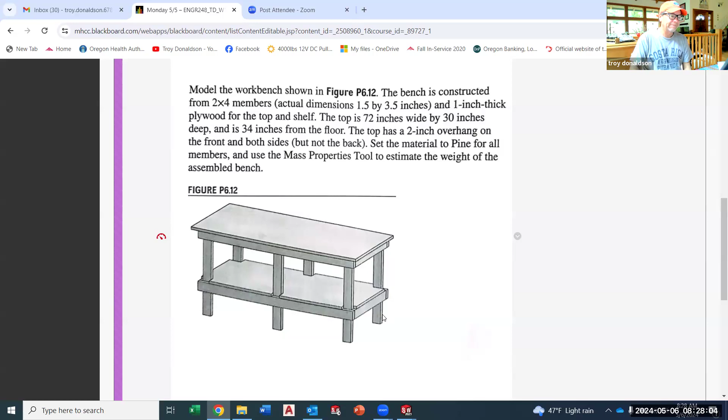In the end, you're going to give me a drawing, so you're going to create a drawing on B size. This will be additional practice at creating drawings with dimensions. Maybe a front, top, side view would be good. It'll be a drawing of the assembled table, and then just call out some important dimensions so somebody could actually build it. So that's our goal, is to create a drawing.

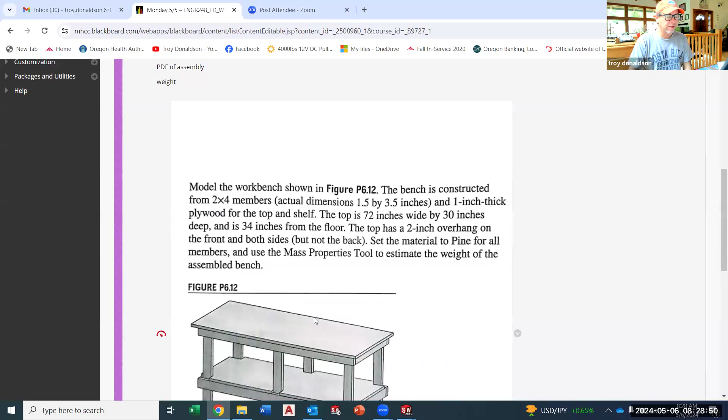All right, the top is 0.75, three quarters of an inch pine. And use a 2-inch overhang on the front and the two sides, but not the back. The back is flush because it would sit up against a wall.

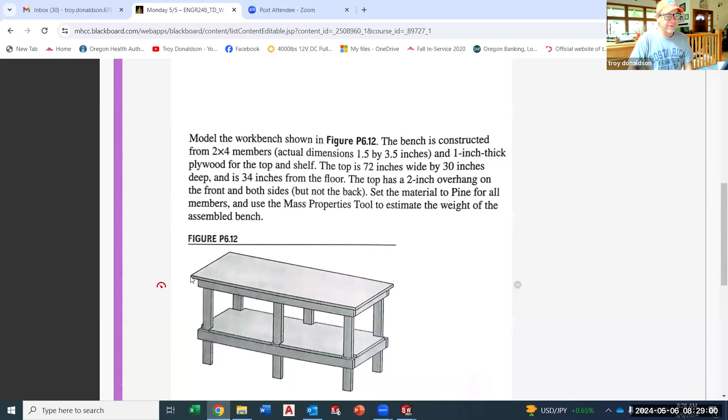So, all right, that's enough. So that would make the top 76 inches by 32. So maybe I'll model that also.

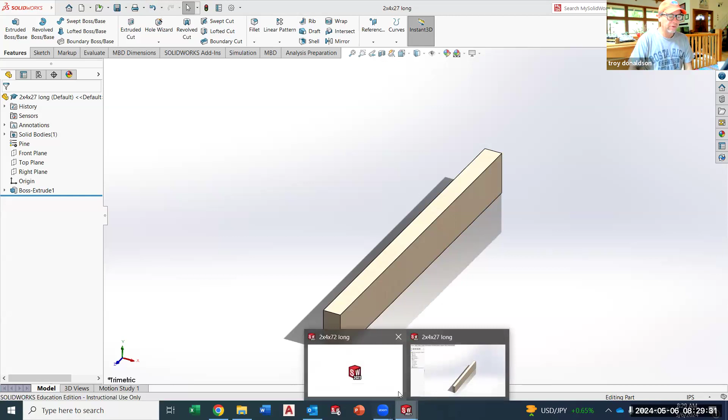So you can see I have some parts going, and I name them by their size. I just think that's easiest. You can name them long board or whatever, but then I can use these parts in the future for other assemblies potentially. So this is the shorter 27-inch, I also have the longer 72-inch one, and I'll use that one to start my assembly.

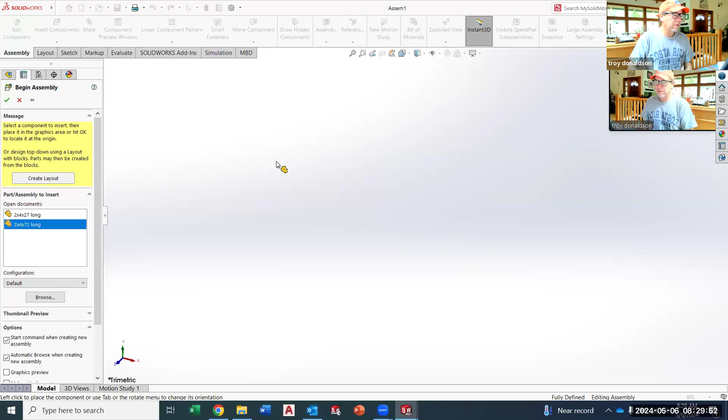Get your parts modeled, and then come up and go to File, Make Assembly from Part. This is very much like we did with the link. Out here, you've got to click, you can see it's chosen. Once you click, it places it, so that one's kind of locked in place.

Then I'll go insert. Actually, I'll do my save, that is good practice to get your save done right away, because 'Assembly 1' is just not going to work. So maybe I'll call it Donaldson week 6 table assembly. All right, save.

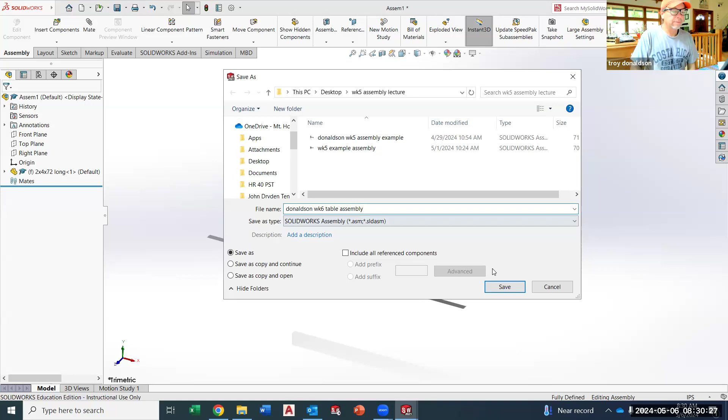This is actually going into a folder on my desktop. My desktop was acting weird, so it wouldn't let me create a folder. So I finally just gave up on that.

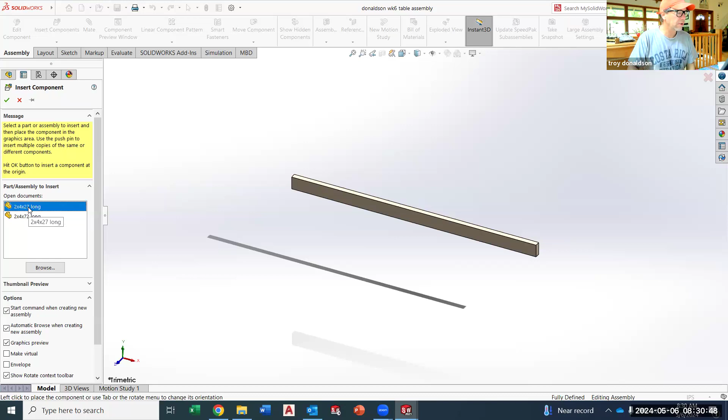Anyway, so then we're going to insert components, and again, if those components are open, they'll show up on the list. I want to insert the short one, so we'll bring that in. Once you bring it in, you can drag it around, but that's not the way to position it because it's just difficult to do that. Again, just keep track of how it goes together, so this one fits inside of these two.

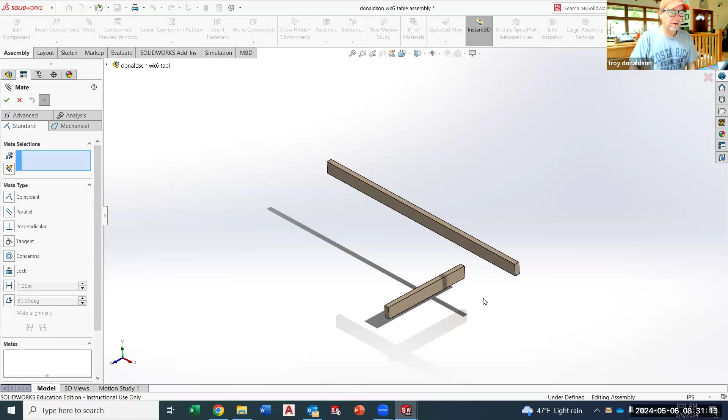So I'm going to mate it face to face first. I could do a number of different ways here. Maybe I'll show you a new way. I'll go edge to that edge. So that mates it up, and it looks like it does it.

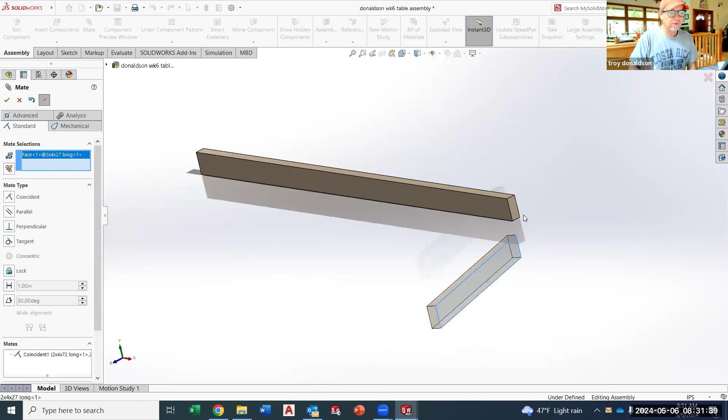But remember, it's still got these other degrees of freedom that we don't want in this project. So then I'm going to mate this surface and that surface, so now it no longer will rotate. And then I'll mate the top surfaces.

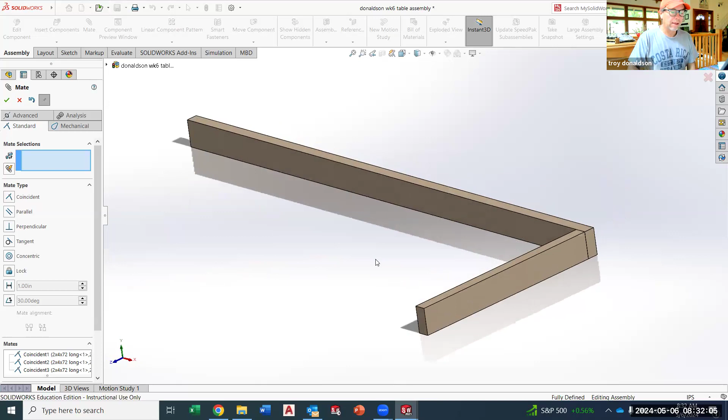So I'm actually going to use 3 mates. 1, 2, and come on, I should zoom in, but 3. All right, so now that's in there. I can't move it, clicking and dragging, not being able to move it. So just continue to check and make sure you're assembling it the same way. That's how it goes together.

This one then goes on the outside. So once you have a portion of it done, you can do copying and a bunch of other things. So that might be the way to go.

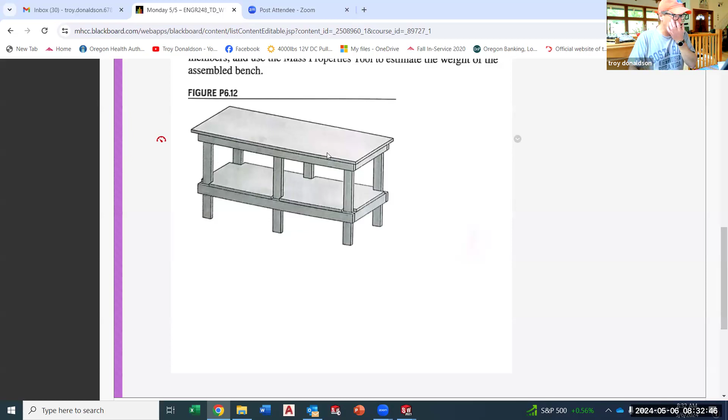You could actually play with the array once you get this top done to make the lower shelf, because it looks like the lower shelf is kind of the exact same thing. It's going to go around these legs, right? So this also goes around those legs. So the top shelf and the lower shelf, they're the same if I had one of these legs.

All right, let's keep going a little bit, I'll do a little bit more. I'm going to insert again, this time the 72, bring it in and mate it up. So I'm going to go from here to here. Yep, and then the top mate again. Yep, and then maybe a surface mate, surface to surface.

So bringing it in. Uh-oh, look what I did, I brought it together incorrectly, right? So that last one is just not the right one. So if I hit the check mark, all your mates are down here. I think we went over this before, and you can scroll over them.

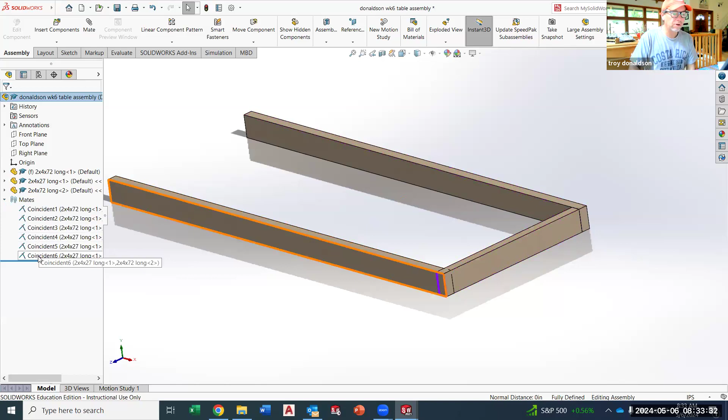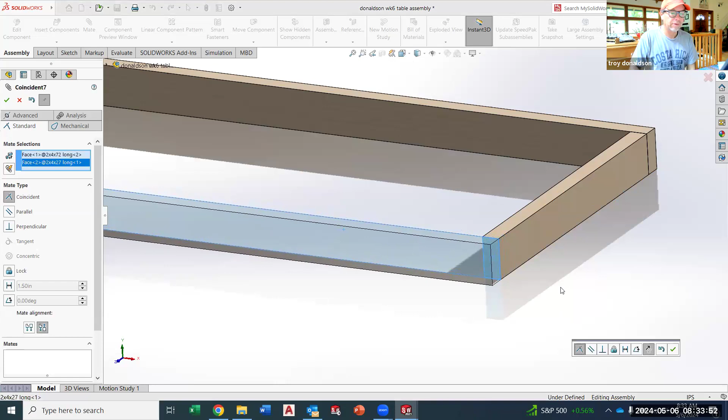This one's good, this one's good, this one's not good. So I'll just click it and hit delete. It'll say are you sure, and I'll say yes. So now what I want to mate is this inside surface to this outside surface here. That'll scoot it out. All right, see what we get. Very good, all right, so that's good.

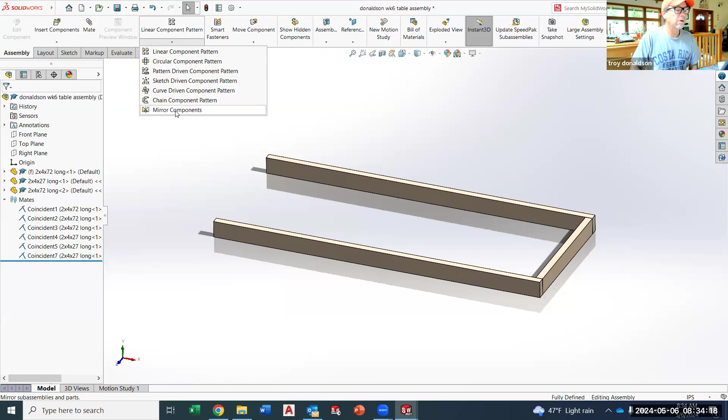Like I said before, there's move component here, but under move, there's rotate component. So if there's freedom to rotate, you could do that. Under linear pattern, there's a bunch of opportunities to do different things with components. So all of those are good, you can use any of those anytime.

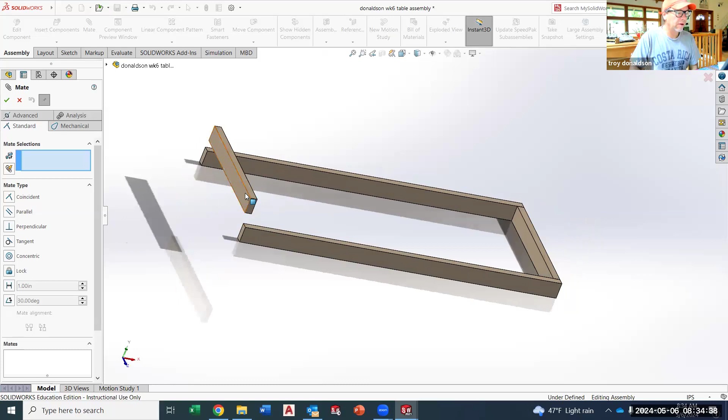So practice with them. I'm just going to continue to insert. I'm going to bring the 27 in again and then mate it up. So maybe I'll go this surface out here with that surface right there. So that looks good, right? It lined it. Oh, nope.

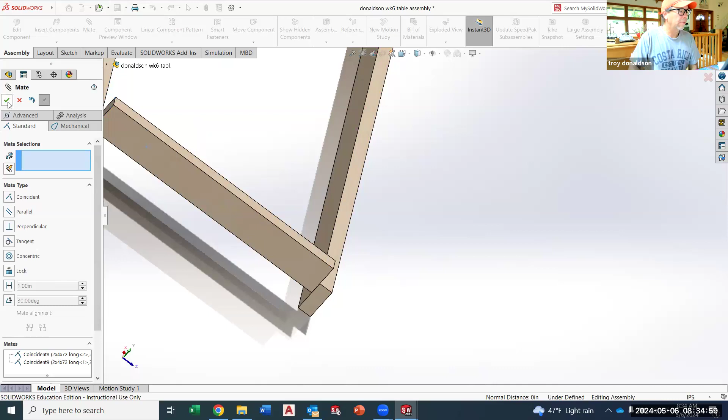Oh yeah, that's right, yeah, it's so easy to get confused. So just take your time. That one with that one. Well, that looks good. And then this top with this top. So I have my frame, my upper frame is done.

So it's getting there, right? Now's a good time just to hit the save button to make sure you get all that saved. All right, so then you just keep manufacturing.

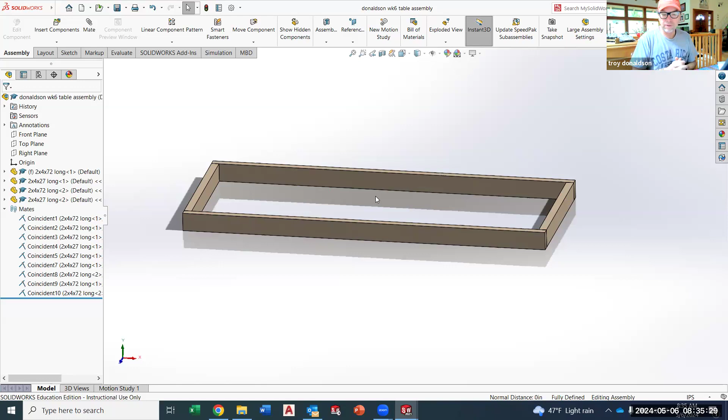I'm going to show you a bit of a more complicated way to build within an assembly. So up to you if you want to use it. At some point I'm going to encourage it because it is beneficial to work this way, but you don't have to. I could just go file, new part, and then do another part, make the leg. But I can also do that within SolidWorks.

So inside of SolidWorks, you can actually pull down and say new part. Now this is a little bit of a process, so you're going to want to pause this and make some notes. When I hit new part, it actually makes the part right there, part 3, but it also puts a green check mark on your mouse. See that right there? Green check mark on your mouse. So you got to click. That places that part. So now there's like a blank part file sitting there, okay?

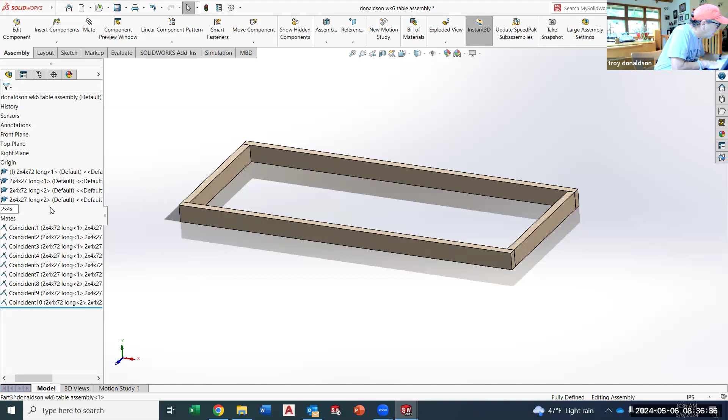And it's right here, and I would rename it right away. That's clicking on it once to make it blue, then clicking again to give it a name. So it's going to be 2 by 4, and it's 34 inches from the floor to the top of this frame. That's the other piece you need, 34 long. I'd probably call this one leg, to identify it better. When you hit enter, it gives you that name right there. Now it's still just sitting here, we're not editing it, it just placed it.

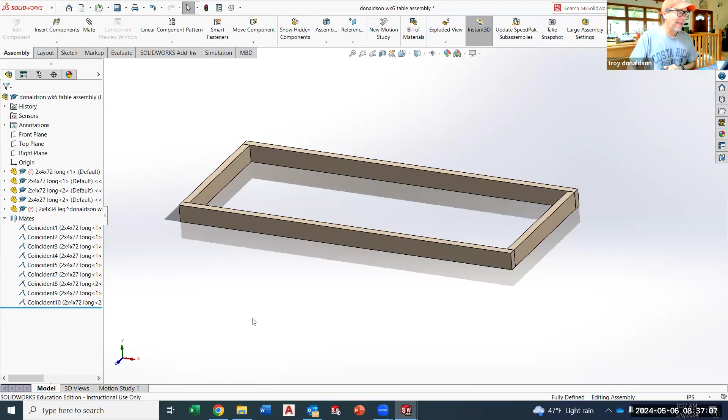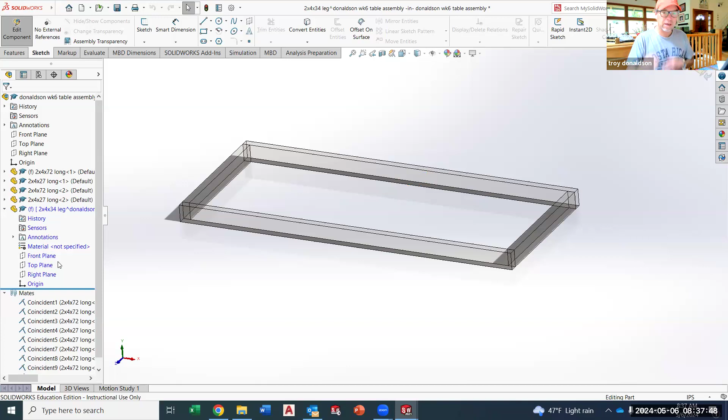So to edit it, you have to click on it and hit edit part. Now the assembly gets ghosted out, but I can still use it and make my new part. So now I'm in part modeling, where sketch gives me my sketch tools, features gives me my feature tools, but they're slid over because there's some assembly buttons here in the beginning. So I am part modeling because it says edit component and the part is blue. See how it's blue? I can open it up and it looks like normal part modeling. So I have to switch in my head - I'm not assembling right now, I am part modeling when that's blue.

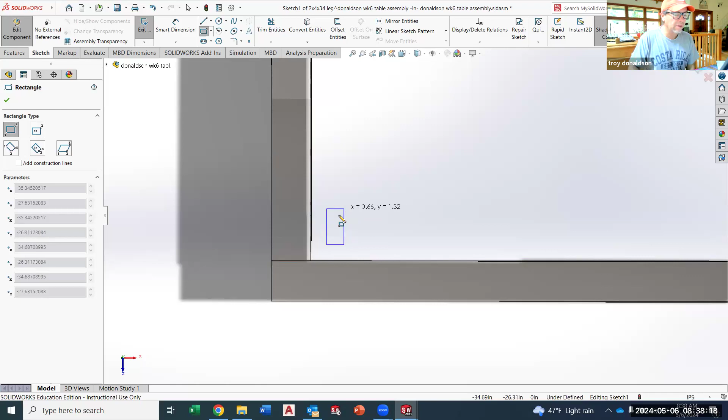So I can go sketch and make a sketch, and I can use the assembly. I'm going to sketch in this top surface. I'll make this a top view. Sometimes it won't grab things - maybe I'm going to get this spot, maybe I'm not. So maybe I'll just come out here and make it away, 3.5. Whoa, what happened? That was weird. All right, there it is, 3.5. That was odd, I don't know what happened there.

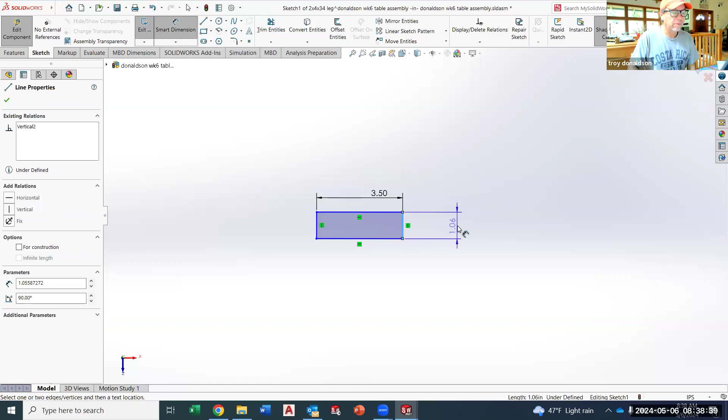1.5, right? And then I need to extrude it. I'm going to send it down, flip it over, and 34 inches. All right, 34 inches. Boom. So there is a leg, right?

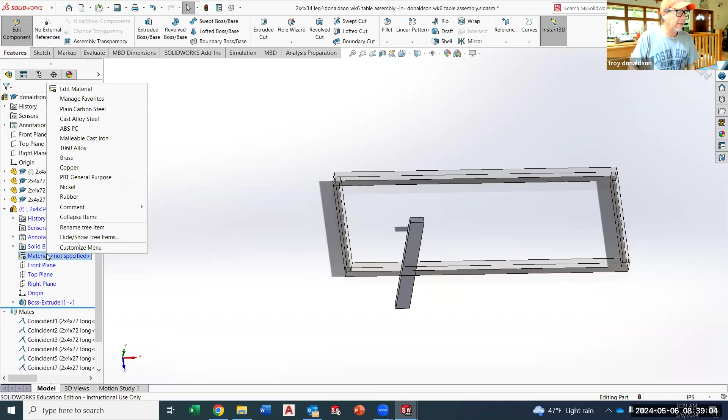I want it pine, so I'm going to go ahead and make that material change. Remember, steel is always open, so I close it. I'm going to go into the woods and choose pine and apply it. All right, so now there it is, my part - it's just a part.

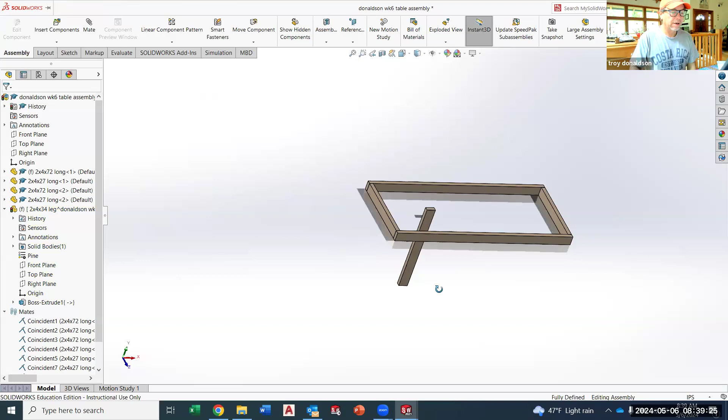Let's get out of editing it because it's done. All right, so now I'm back into my assembly, and I'm no longer part modeling. It's no longer blue. I'm actually going to close it. It's just one of the parts in the assembly. If I try to move it, it's locked - it's actually called fixed. So I can right-click on it and float it.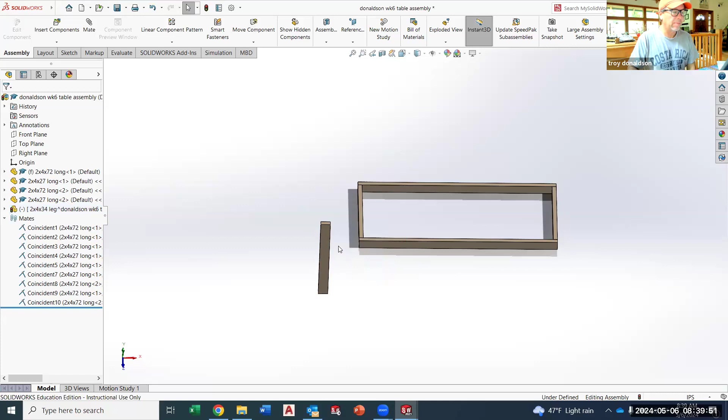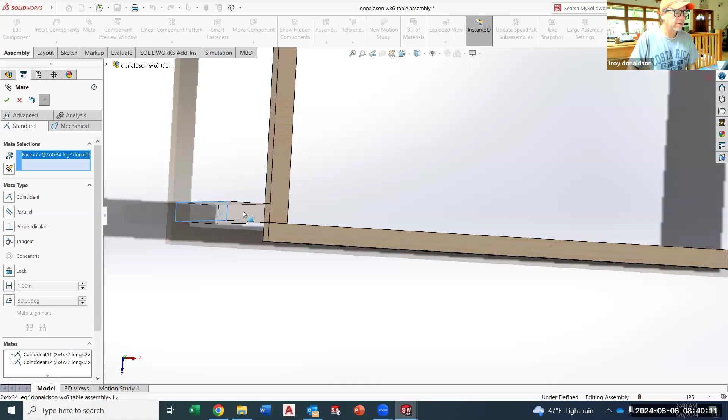Now I can move it around and mate it up. So that is part modeling within an assembly. It's tricky, so it takes some practice, and you'll have to remember all the steps to make a new part within an assembly.

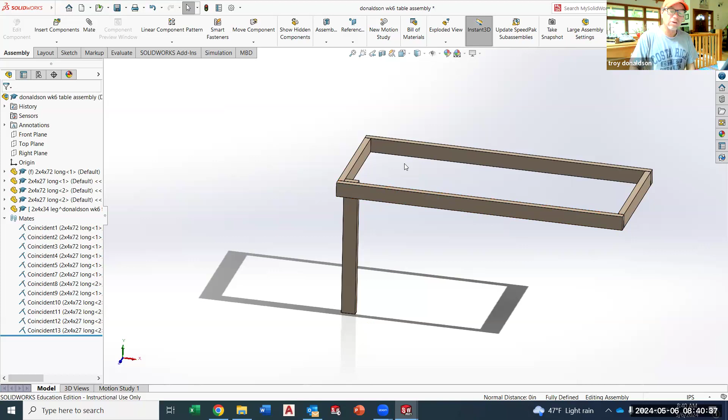So the key is I did not leave the assembly to make the leg - I made the leg within the assembly, and I used the assembly. You can use the assembly parts and pieces if you can grab them. It doesn't always want to grab them - like I tried to grab this corner and it wouldn't let me right there. But that's all right, I just still made the part and then mated it up.

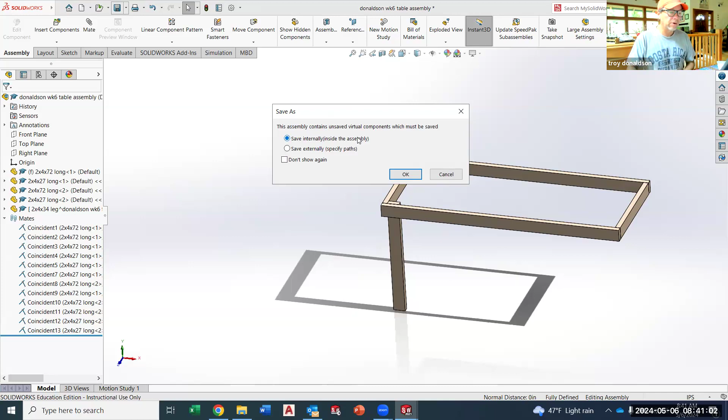Okay, now I hit save. So when you hit save, it sees that new part and it says, hey, do you want to save this new part within the assembly? And I'm like, sure, absolutely. You can save it internally, which means it'll be in the assembly, or you can save it externally. I like to save externally - it's going to go into that same folder because then I could use that part in other assemblies in the future if it's external.

All right, that was a lot, but it is some simple objects, it's not a complicated table. It will take you a while though to make the parts and pull them all together and make the top and also make the shelf. So good luck, let me know how it goes.